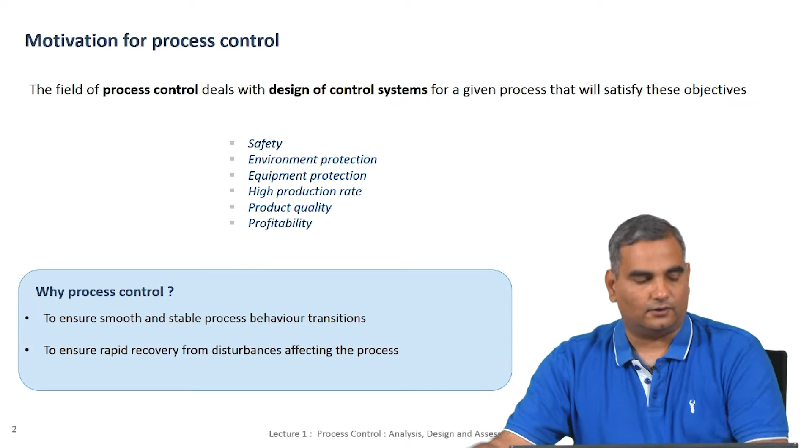This is a very simple engineering example, not necessarily chemical engineering or mechanical engineering. It is just a simple example that we see day to day that I had used in my introduction video to explain process control. I am going to take again the same example to introduce some terms that we will see again and again in this course. So, I talked about an activity that many of us have undertaken, which is drive a motorbike on a road, and we talked about this before.

We might want to ride the motorbike at a certain speed, which we might say is what we want to have because that is where it is most fuel efficient, or it could be just a personal preference. I talked about this already. So, you might want to drive a little fast with the wind blowing on your face, or you might want to drive a little slow to take in the scenery surrounding you and so on.

So, what we really want to control in this process is the speed of the bike, and what we have to manipulate to control the speed. So, whenever I want to set the speed at some value, there has to be something that I can manipulate so that I can increase or decrease the speed as might be the case. So, the manipulated variable in this case is the throttle. If you want to speed up, we increase the throttle. If you want to slow down, we shut down the throttle and so on.

Now, imagine that you are driving on the road and let us say you are driving at a speed that you are very comfortable with. So, let us take this scenario and then ask the question as to why I might need control. The answer to this question is going to tell us there are two types of control that are very important in processes and so on.

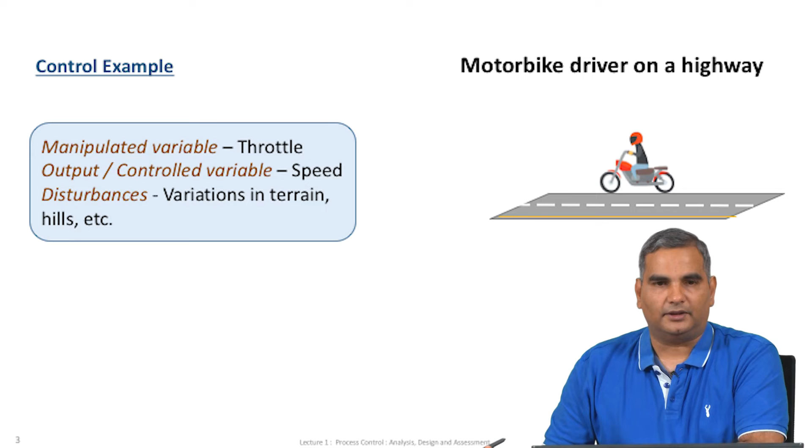So, the first type of control is what I am going to call as regulatory control, which is the most important type of control that is usually done in process plants. So, this relates to actually disturbances and the control variable changing according to the disturbance, and then you do something with your manipulated variable to bring it back to its original value.

Now, regulatory control is one where the manipulated variable is changed in response to this disturbance, so that this control variable ultimately comes to its set point value. So, you might have a certain amount of time before the output variable comes to its set point value. Nonetheless, after a while the output comes to its set point value. So, this type of control which is in response to a disturbance is what is called regulatory control.

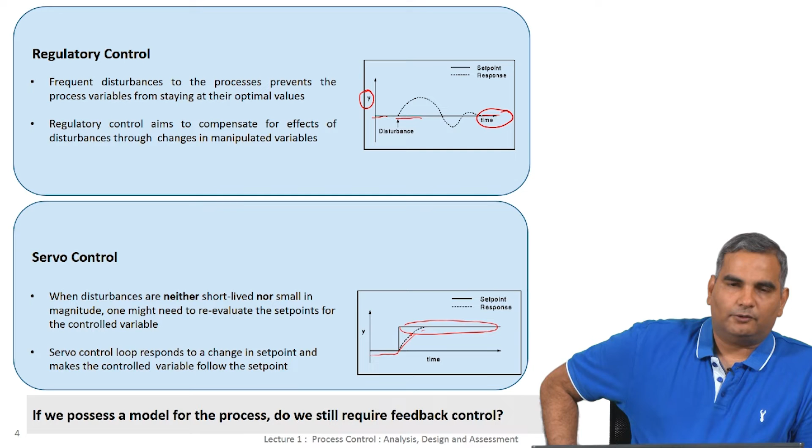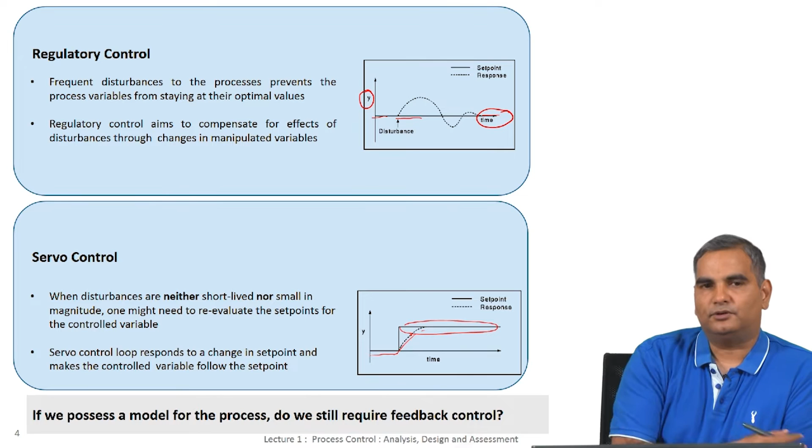Now, we might ask the question, if I have a model for this process, can I do this servo control and regulatory control? In other words, a simple question is, if you know there is a particular throttle position at which I can go at a certain velocity, then is it just a question of moving from one throttle position to another to be able to do this control? It is an important question to ask. Now, the answer to this question is, even if we have a model for a process, we still require what I am going to call feedback control. We will explain what this feedback control is.

This is because whatever models that you come up with, a particular throttle position I will get a certain velocity, it is never perfect. Models are always beset with some error or the other. So, there is some uncertainty always associated with models. So, even if I am able to develop a model for how the control variable will behave with respect to a manipulated variable, you still need this notion of feedback control, which we will explain subsequently, for you to be able to efficiently do regulatory control and servo control.

So, the questions are then, first, since we talked about a model, how does one characterize the behavior of these processes using a model quantitatively? So, that is one question that we ask. And the second question that we ask is, how does one use this knowledge to design effective control systems? So, these are the two fundamental questions that we are going to answer through this course.

Now, I want you to look at some of the words here. Just now when I was explaining the bike example, I said maybe we have a model where a particular throttle position gives you a velocity, right. So, that type of model is what we would call a static model, where we say, okay, if I give you a throttle position, here is a velocity. So, that is like a static map. But in reality, when you are driving these bikes, what you are going to do is you are going to move your throttle from one position to another.

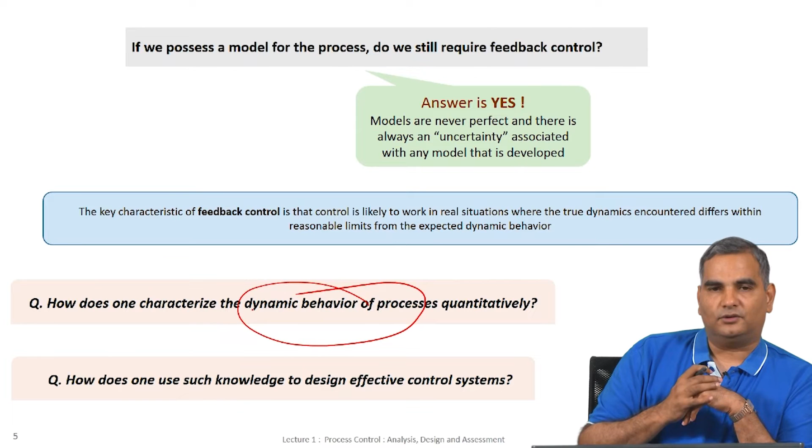And once we have such a model, the next question that we would be interested in is, how would I use such a model to design effective control systems. So, here is where we bring this notion of feedback control for the first time. I am going to stick to the same bike example for a few more slides to explain this concept of feedback control. This block diagram here is something that we will see several times through this course. So, let me start explaining this block diagram.

Before I explain this block diagram, let us think about the feedback control that we actually do as humans when we ride a bike. So, let us assume you are riding a bike at a certain speed, and then there is a sudden incline, and then you start going over the incline, and then the speed comes down.

At this point, the person driving the bike, who is the controller, basically senses that the speed has come down, and you could sense the speed has come down through just a physical means, or you could look at the speedometer reading and then see that I was driving my bike at 60 kilometers per hour. Suddenly I am going down to 55, a little bit later I am going down to 50. And this change is because of a disturbance, which is an incline that has come up, and this is what we showed in the picture in the last slide.

Now clearly you want to be at 60 kilometers per hour and you are sensing the speed is not at that level. So what you do is basically you say, look, there is a difference between where I want to be and where I am at, and that difference in some sense drives how much of manipulation I do.

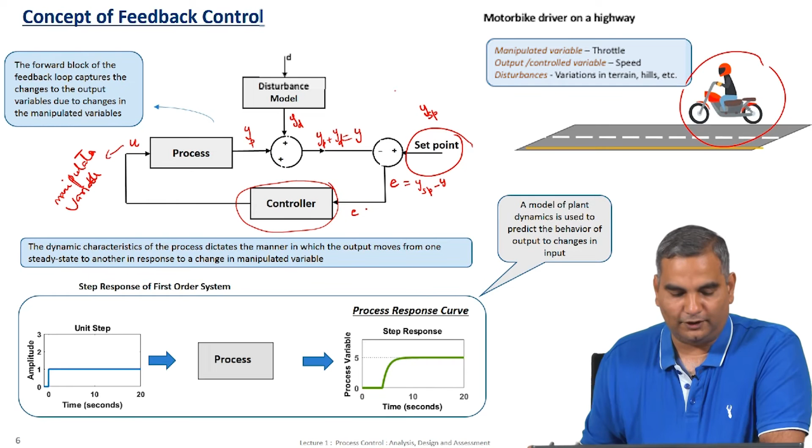Now, similar to this block, this is another circle and it has 2 inputs. One is this y, and let us call this y set point. It says take the difference between this y set point and y, and then the output here is the error, which is going to be equal to y set point minus y, and this error is what goes as an input into the controller. It is the same line, so I have the same e here, and the output is u because it is the same line u.

So now you notice this controller takes the error as the input and then says what should be the manipulated variable, and clearly that is what we saw in the bike. I told you if I want to go at 60 kilometers per hour and I find that I am going only at 55 kilometers per hour, then there is an error of 5 kilometers per hour, which is what makes me move my throttle. So the controller tells you what the output throttle position should be.

So, you can understand this controller. In this example, this controller is really the human being that is driving the bike. Now, this looks a little more complicated. It says I have only one bike, but why do I have 2 blocks? So, you might want to think of this as this, right. So, both of these actually represent the bike.

This block represents the effect of the throttle on the speed. Clearly y is the speed. So, what we want is just the speed. Now, this block represents the effect of the throttle on the speed. So, for example, if you increase the throttle, the speed will increase. If you decrease the throttle, the speed will decrease, and so on.

But the speed of the bike, as we all know, does not depend only on the throttle. I could be in the same throttle position and I will be going at a certain speed on a flat road, and at the same throttle position, if the road is slightly inclined, I will be going at a lesser speed. So, just the throttle position alone cannot model the speed. The disturbance, in this case, for example, the incline of the road, if you think of that as a disturbance, that also dictates what the speed is.

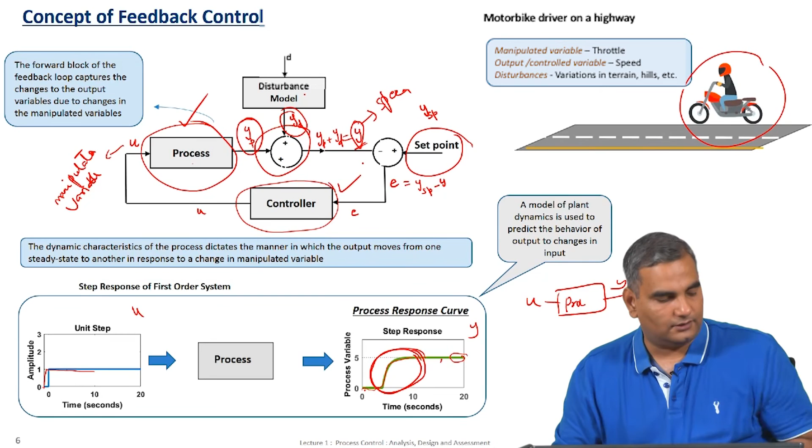Okay. So, in this course we are going to see how to build this disturbance model, how to build this process model, and how to develop these controllers, so that whatever activity we talked about here for this bike, we can take it to engineering systems and let computers do this control for us.

Now, if you notice in the previous example, there is one manipulated variable which is the throttle position, and there is one control variable which is the speed. But in real plants there will be multiple inputs and multiple outputs. So, as I mentioned in the introduction video, we still need to think about how we will do this when I have multiple inputs and multiple outputs. How do these ideas translate to multiple inputs and multiple outputs? This is something that we are going to deal with in detail.

So, in the next lecture, I will talk about how we can think of multiple input multiple output control from the viewpoint of single input single output control. This is because whenever you do an undergrad control class, about 75-80% of the time we typically talk about just SISO control. But we always know that in real industrial processes it is not SISO control, it is going to be MIMO control.

In fact, even in the bike example, if I complicate it a little bit more, I can think of two inputs. The speed is not only based on your throttle, but also on a brake that you apply. If you throttle and apply your brake at the same time, then the speed dynamics will be different from if I applied my brake alone or throttle alone. So, even in that simple example, there are more than one inputs that affect the output, and for large complicated processes it is definitely going to be MIMO control.

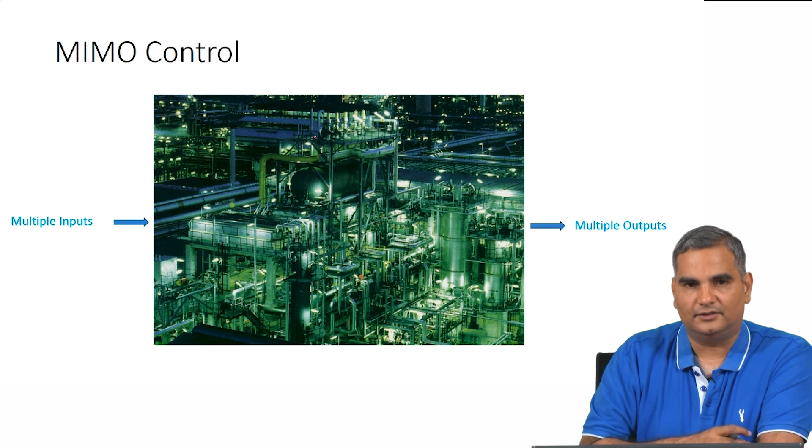So, I will come back in the next lecture, pick up from here, and explain how a MIMO control problem is broken down into several SISO control problems without losing the essence of MIMO control, and later we will see MIMO control completely as MIMO control itself. I hope this introduction set the tone for what is going to come in the future lectures.